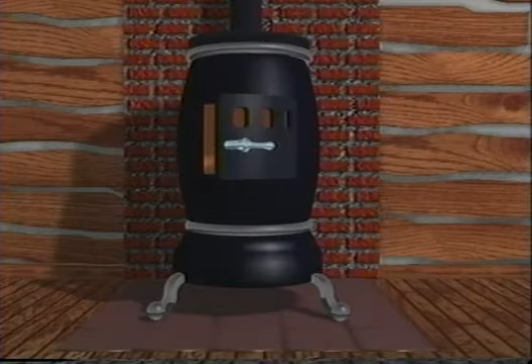Heat from fire warmed mankind long before recorded time. As centuries passed, we learned how to control fire to better warm the spaces in which we live. Ours is an unending search to produce heat safely, economically, and as needed. As technologies evolve to better meet one of mankind's most basic needs, understanding will unlock the doors to a more comfortable future for all of us.

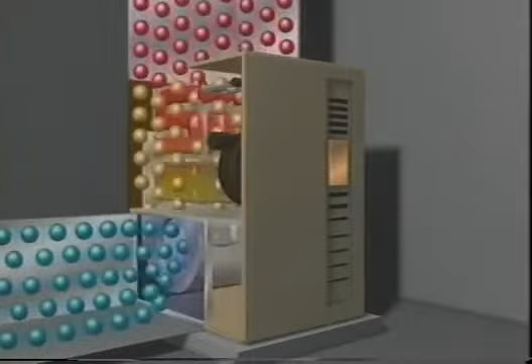Modules 1 and 2 presented an introduction to the basic principles of gas furnaces. Module 3 covered an introduction to gas-fired furnaces, which linked the basic principles to an overview of furnace design, types, applications, and operation. Module 4 discussed the theoretical principles of gas burners, their components, and flame and combustion characteristics.

This module, Gas Controls, focuses on the controlled combustion process. Gas controls, the manual and automatic valves and regulators which control the flow of fuel gas to the orifice and burner, will be explained. The function and operation of various gas controls will be included.

In their broadest sense, gas controls also include the gas ignition systems and some of the safety controls used to regulate combustion in a furnace. Because of the amount of material involved in the full coverage of furnace control systems, the material has been split into 3 modules. Besides the information included in this module, Module 6 covers gas ignition systems, and Module 7 covers furnace safety and operating controls.

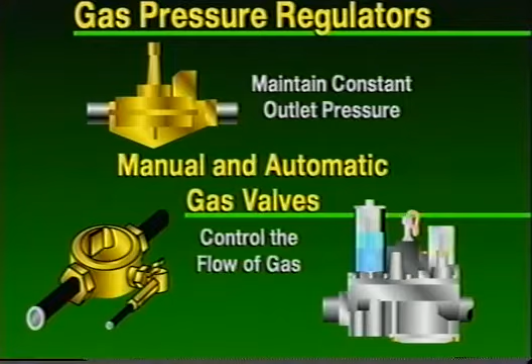It is extremely important to understand the application of a gas control because arbitrarily changing one for another can lead to trouble. Gas controls are carefully selected for a furnace application by the manufacturer for proper function and safety. Therefore, only replacements recommended by the manufacturer should be used.

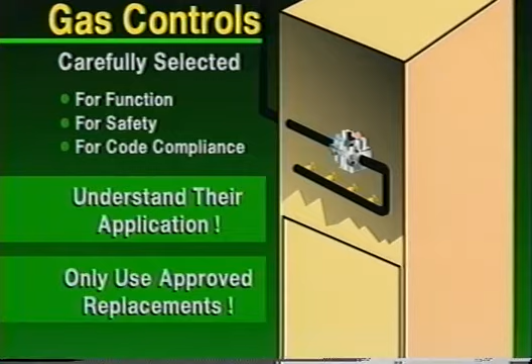Another important consideration is the great variety of control designs available. Gas furnace manufacturers have changed controls from year to year and model to model. Their aim has always been to produce the most reliable and best performing products with the latest technology. Because of the large number of control variations, it's impossible to cover all controls. Therefore, selected examples will be used to explain generic operating principles, adjustment and checkout procedures that apply to most of the gas controls in common use today.

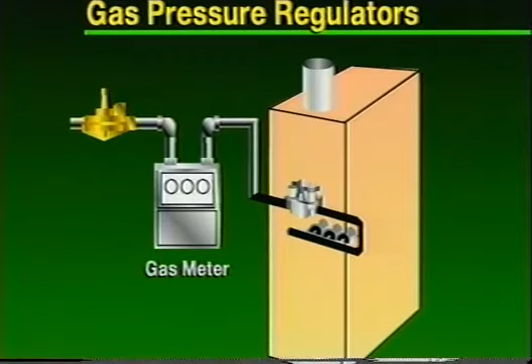The function of gas pressure regulators is to reduce, adjust, and maintain gas pressure downstream regardless of the gas supply pressure upstream. There are 3 pressure regulators used in a typical gas heating system. The first, the service regulator, is used in the gas supply line to regulate pressure to the gas meter and line supplying the furnace. The second, the gas manifold pressure regulator, is located next to or inside the furnace to regulate the gas pressure to the gas valve and manifold. The third is sometimes used to regulate gas pressure to the pilot.

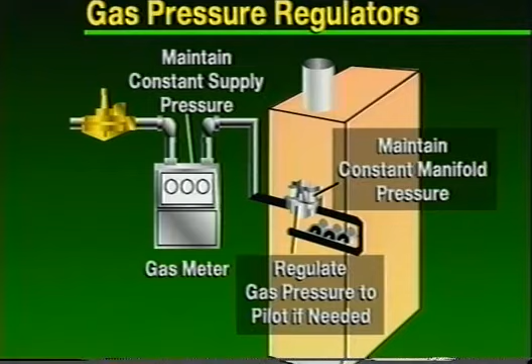Variations in utility supply line pressure are common, and pressures may be too high for direct connection to a gas furnace or other gas appliance. Therefore, a service regulator is required to reduce, adjust, and maintain the pressure being supplied to the appliances in a building. For natural gas,

this regulator is usually provided by the gas utility and installed upstream of the gas meter. It should be adjusted by the utility to supply a pressure of approximately 7 inches of water column at the inlet of the furnace when the furnace is operating. The pressure supplied to the furnace should never exceed the maximum pressure on the furnace rating plate, which is about 13.5 inches water column. Also, the pressure supplied to the furnace should not be less than the minimum of 4.5 inches to assure that the furnace can be fired at rated input.

LP gas service regulators are installed at the gas storage tank by the supplier and set at 11 inches water column. They should only be adjusted by the gas supplier.

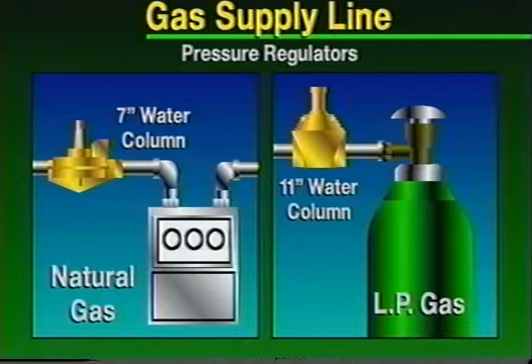Gas furnaces are designed to operate with manifold pressures somewhat lower than the supply pressure. This allows for pressure drop in the gas piping and assures that there will always be adequate pressure to operate the furnace at its rated input.

All natural gas furnace installations have a pressure regulator to control manifold pressure. On most furnaces, the pressure regulator is built into the combination gas valve.

However, you may find some furnaces with a separate gas pressure regulator located on the manifold upstream of the automatic gas valve. On others, it may even be located just outside of the cabinet. Wherever they are located, they all function the same way.

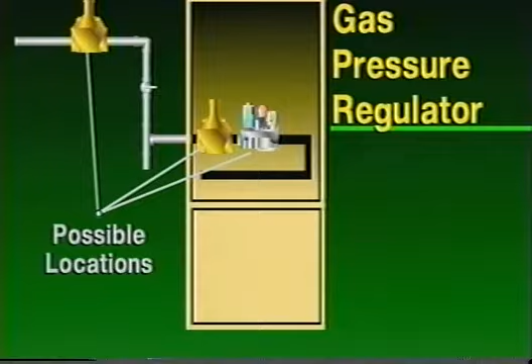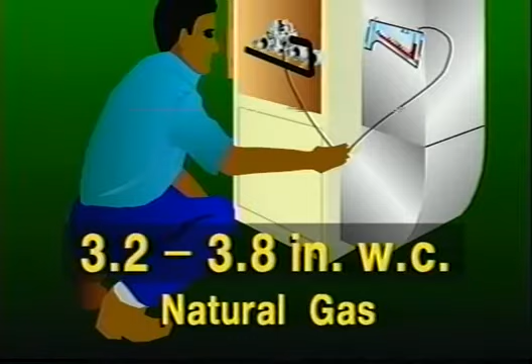Furnace pressure regulators for natural gas should only be adjusted when the furnace is operating. They are usually factory set for a manifold pressure of 3.5 inches water column and may be adjusted on-site within the range of 3.2 to 3.8 inches water column for rated input.

For LP gas, there is no manifold regulator. The service regulator on the tank controls the manifold pressure. If there is a regulator in the gas valve, the manifold pressure should be adjusted between 10.5 and 11 inches water column for rated input.

Manifold pressure can be measured with a water manometer connected at the pressure tap located either on the manifold or on the automatic gas valve.

A typical gas pressure regulator operates the same whether it controls the supply line pressure or manifold pressure. A regulator consists of a flow modulating valve connected to a spring-loaded diaphragm.

The diaphragm senses the difference between the outlet gas pressure below and the atmospheric pressure above. The resulting force on the diaphragm pushes upward against the spring, adjusting the position of the valve to modulate the gas flow.

This is an important concept to understand because it's the outlet gas pressure that is to be held constant with respect to atmospheric pressure.

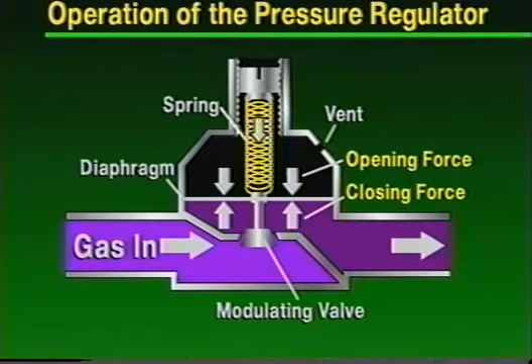The outlet pressure under the diaphragm working against atmospheric pressure and spring force above acts as the closing force on the flow modulating valve.

The spring force can be adjusted by turning a screw. When the downward force of the spring is equal to the upward force of the outlet gas pressure on the diaphragm, the regulator is in equilibrium.

This sets the partially open position of the valve to control the gas flow and hold the outlet gas pressure constant at the desired setting.

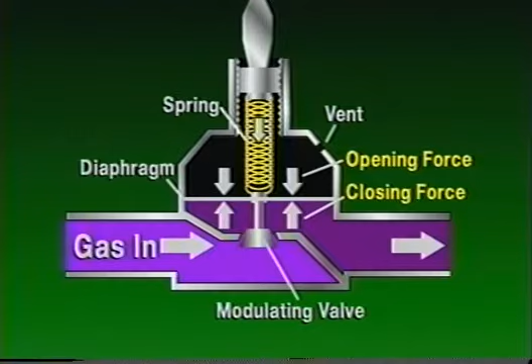The diaphragm and spring remain in equilibrium until there is a change in the inlet or supply pressure or a change in the rate of gas flow through the regulator to the appliances. It's important to understand that the regulator only functions when there is flow through it.

A decrease in the gas supply pressure reduces the outlet pressure under the diaphragm, reducing its upward force against the spring. As the spring becomes the stronger force, it begins to push the valve downward, permitting more gas to flow through the valve.

This increases the outlet pressure back toward its initial setting. The increased pressure under the diaphragm acts against the spring force to close the valve.

These forces come into equilibrium with the valve slightly more open than before the line pressure decreased, but with the outlet pressure held constant. An increase in gas flow through the regulator causes a similar response in the regulator.

If, for instance, a second appliance turns on, the supply regulator must pass more gas but keep the outlet pressure nearly constant. When the second appliance comes on, the regulator outlet pressure starts to drop, reducing the pressure under the diaphragm.

This results in a new equilibrium point with the valve slightly more open and the outlet pressure constant. Note, if the line pressure decreases too much, the regulator may not be able to maintain adequate manifold pressure.

An increase in the gas supply pressure increases the pressure under the diaphragm, pushing it up and closing the regulator valve to reduce the flow. As the outlet pressure is reduced, the spring and diaphragm forces come into equilibrium with the valve slightly more closed than before the line pressure was increased.

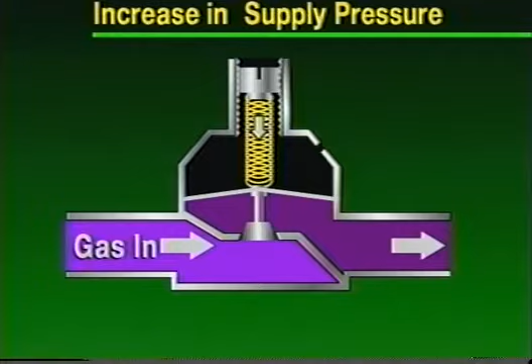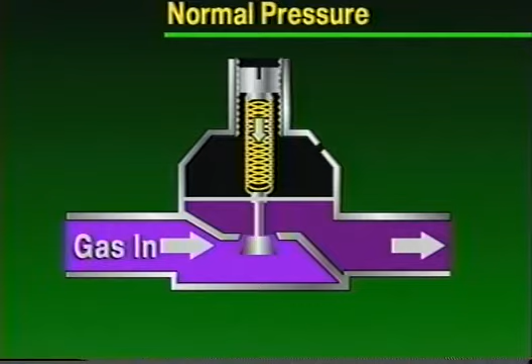A decrease in gas flow through the regulator acts in a similar manner. For instance, if one appliance shuts off, the outlet pressure increases. The increased pressure under the diaphragm tends to close the regulator valve and to reduce the flow and the pressure.

A new equilibrium point will be established with the valve slightly more closed. The outlet pressure remains constant at its original setting.

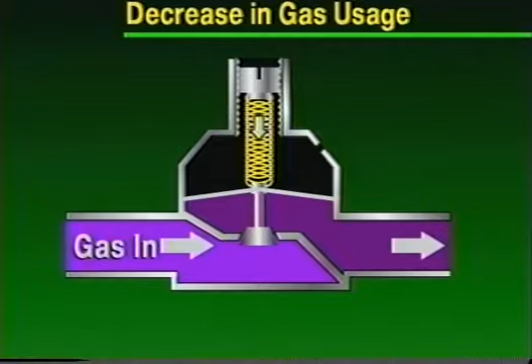A vent opening is needed on a regulator to assure that atmospheric pressure reaches the top of the diaphragm.

For safety reasons, the vent opening must be relatively small to minimize the rate at which gas could escape in case of a diaphragm leak or a ruptured diaphragm. To control the rate of gas escape to a safe level, most regulators have a leak-limiting orifice incorporated in the vent. This orifice is sized to permit the diaphragm to move easily, yet allow only a very small amount of gas to bleed through the opening in case of a leak.

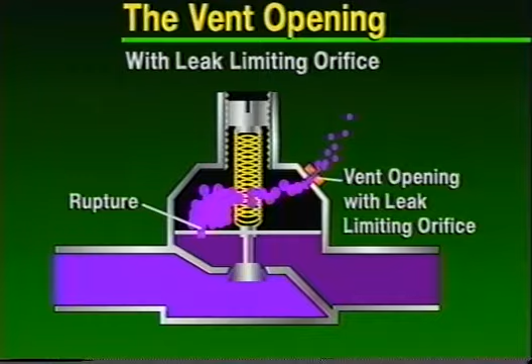Important: the vent opening must be kept open for the regulator to work properly.

If a leak-limiting orifice is not used and the regulator is indoors, a vent line must be installed to carry any escaping gas to the outdoors or into the pilot flame where it can be burned safely. Again, the vent line opening must be kept open for the regulator to work properly.

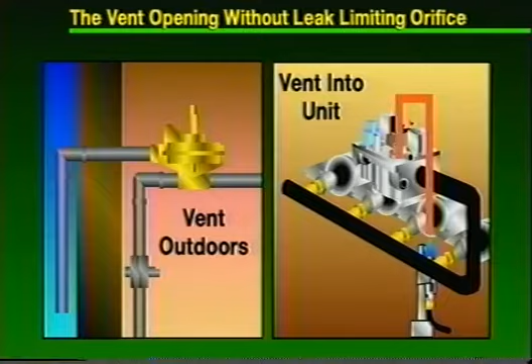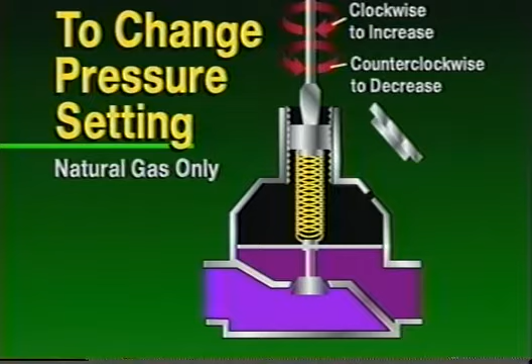To change the pressure setting of a gas pressure regulator, turn its adjustment screw in or out. This varies the spring force exerted on the diaphragm. To increase the pressure setting, turn the adjustment screw clockwise. To decrease the pressure setting, turn it counterclockwise.

Important: gas pressure adjustments can only be made when there is gas flow to the appliance and should never be made without using a manometer or pressure gauge to measure outlet pressure. For pressure regulators controlling manifold pressure in the furnace, pressure taps are provided either on the combination valve or the gas manifold for connecting a manometer or gauge.

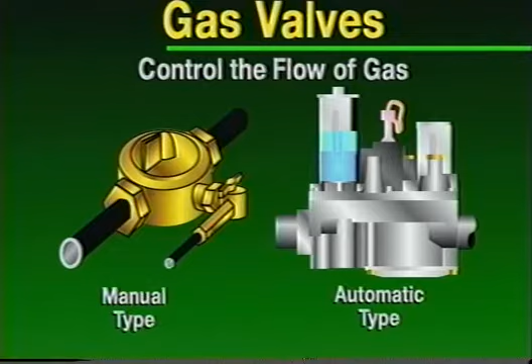Gas valves control the gas supply to any section of the system piping or to an appliance. Gas valves can be either manual or automatic.

All gas supply lines and furnaces must be equipped with manual shutoff valves for service and safety. An accessible manual shutoff valve must be provided by the utility in the gas supply line upstream of the supply gas pressure regulator and meter.

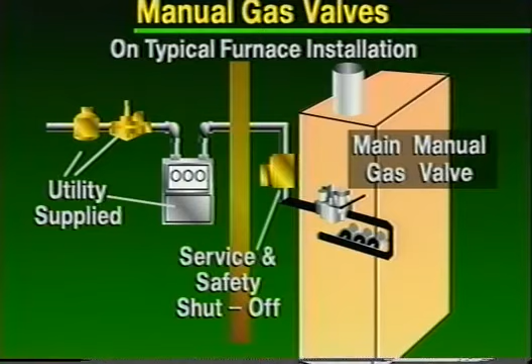Also, it is required that an accessible manual shutoff valve be installed within 6 feet of the furnace for service and safety. A manual main gas shutoff valve is required in the furnace upstream of the regulator and automatic gas valve to shut off the gas supply to the main burners.

Pilots may be provided with a separate shutoff valve. The manual main gas shutoff valve is either built into the automatic combination gas valve or separately installed on the manifold upstream of the gas pressure regulator.

Manual shutoff valves also are used for the pilot gas line. They may be separate or built into the automatic combination gas valve. On non-100% shutoff systems, they connect into the gas line upstream of the manual main shutoff valve so that shutting off the main gas will not shut off gas to the pilot.

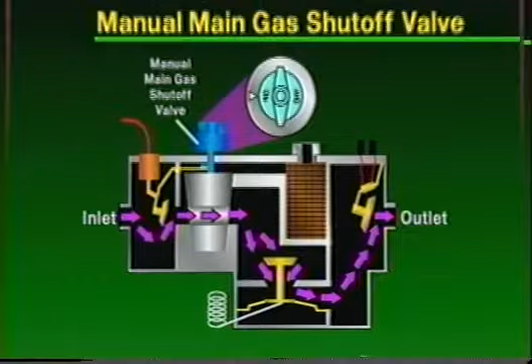All separate manual shutoff valves are of the quarter-turn plug cock type. This type of shutoff is open when the hole in the tapered plug lines up with the piping. The hole is the same diameter as the inside diameter of the connecting piping, so that the gas flow has minimum disturbance and pressure loss as it flows through.

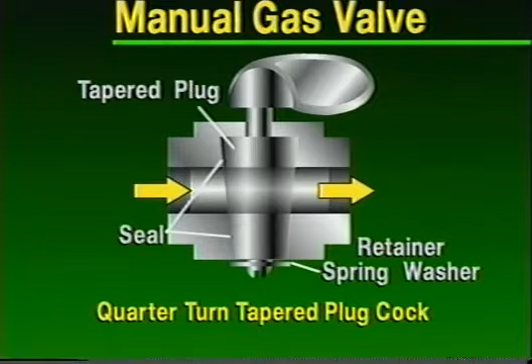Turning the handle or plug 90 degrees closes the shutoff valve completely. From the outside, you can tell that the shutoff valve is open when the handle or wrench lug lines up with the piping or gas flow direction. The shutoff valve is closed when the handle is positioned crosswise to the piping or flow direction.

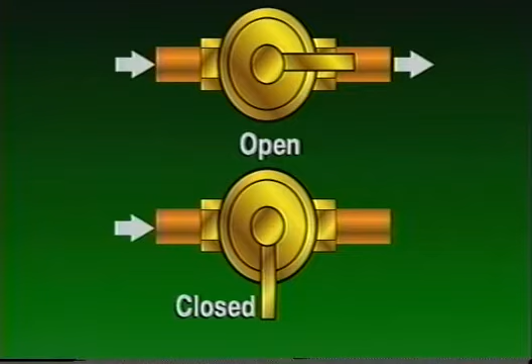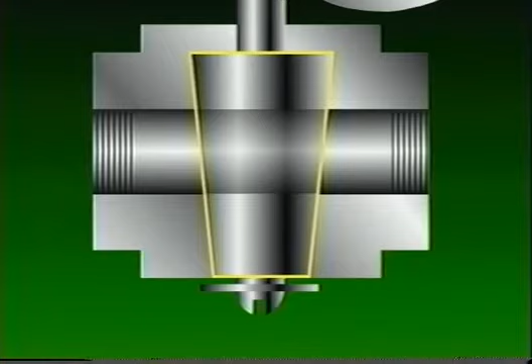This type of shutoff valve does not require any packing or external seals to prevent gas leaks. This is because the tapered plug fits so precisely in the tapered bore of the body that it forms a gas-tight seal. A retaining spring holds the tapered plug tightly against the tapered bore. Usually, a silicone grease is used between the plug and body to ensure the gas seal and to provide lubrication for easier rotation of the plug.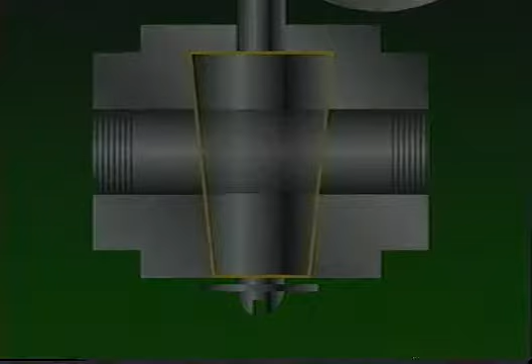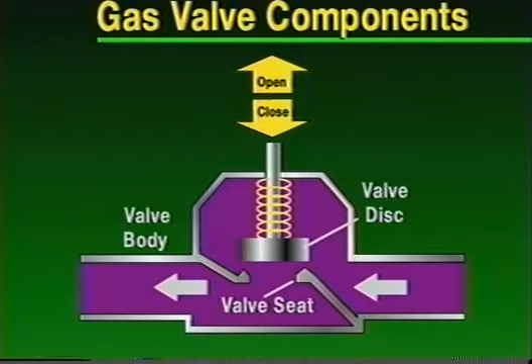An automatic gas valve consists of a valve and an actuator that control the supply of gas to the burners of an appliance during operation. Automatic gas valves usually are of the disc-on-seat type. The main parts are the valve body, valve seat, valve disc, valve stem, return spring, and actuator.

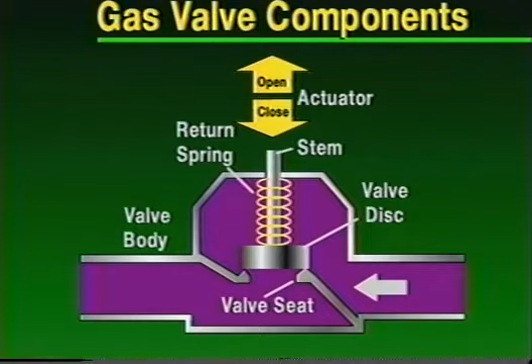The actuator is an electrical device that lifts the valve disc off of the seat when it's energized. Gas flows through the valve when the disc is lifted off of the seat. When the valve closes, gas pressure from the supply line and the return spring holds the disc against the seat, ensuring a good seal. However, to open the valve, the actuator must have enough strength to overcome the force of the gas pressure on the disc as well as the force of the spring.

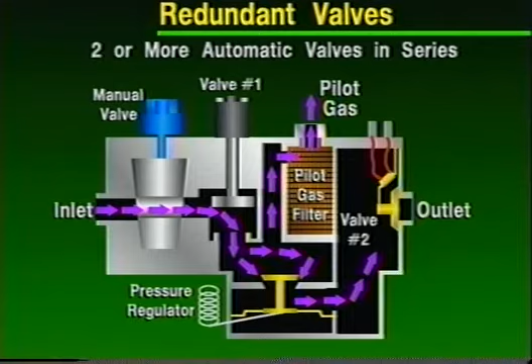Safety codes require that automatic combination gas valves incorporate two or more automatic valve mechanisms in series, along with a pressure regulator and manual valve. These are called redundant valves because both valves would have to fail open for an unsafe condition to occur. However, single-seat type automatic gas valves may be found on older installed furnaces. The operation of redundant gas valves will be discussed in detail later in this module.

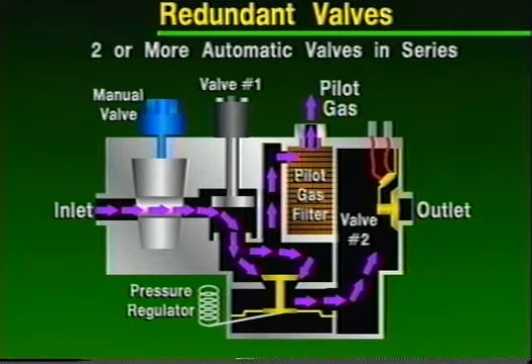In the next section, the basic actuator mechanisms found in automatic valves are covered. All valve mechanisms used in automatic gas valves are classified by the type of actuator used to lift the disc off of the seat. Common gas valve actuator classifications are solenoid, magnetic diaphragm, bimetal diaphragm, bimetallic direct opening, and thermocouple.

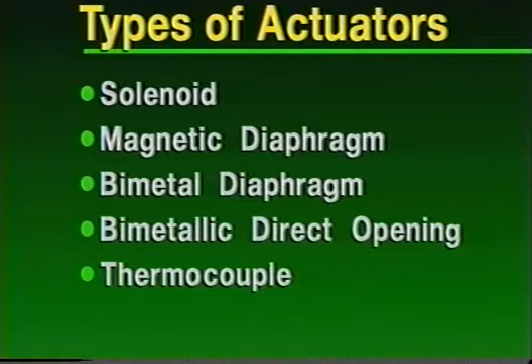The direct-acting solenoid gas valve is normally closed when the solenoid coil is de-energized, meaning the valve closes when power is interrupted. When the coil is energized, the magnetic force generated by the coil attracts the iron armature on the valve stem and lifts the valve off of the seat. The valve stays open as long as the coil is energized.

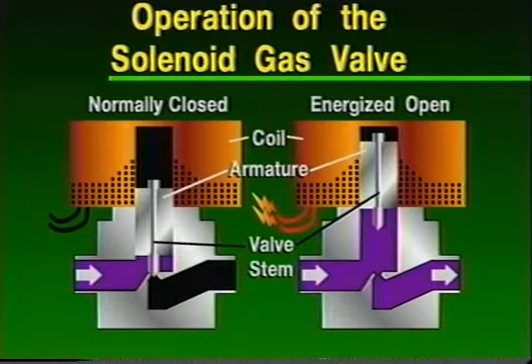Rubber or plastic seats are used to improve sealing and to eliminate closing noise. These are often called soft seat valves. Some valves use a spring above the armature, while others are filled with oil to eliminate the opening noise.

The amount of force needed to overcome the gas pressure and lift the valve off of the seat is proportional to the valve seat area. However, the amount of force needed to hold the valve open is much smaller. This means a large valve needs a large solenoid coil only for opening. The problem is that large solenoid coils draw more power and may need special cooling.

The pick and hold concept provides one solution to large valves. This design has two solenoid coils: the powerful pick coil and the less powerful hold coil are used together to open the valve. Once the valve is open, the pick coil is de-energized and the lower power hold coil remains energized to hold the valve open. How the pick and hold feature may be incorporated into the electrical safety circuit of the furnace will be discussed later.

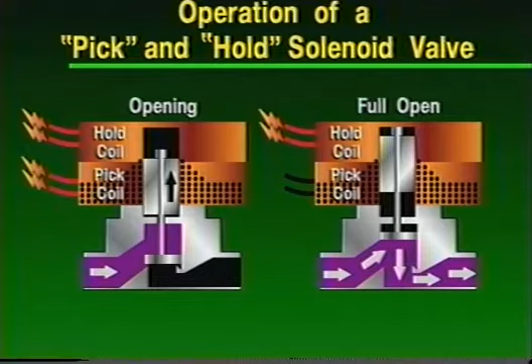The magnetic diaphragm uses a small solenoid valve in combination with a diaphragm valve to get around the seat size limitations of a direct-acting solenoid. The diaphragm utilizes gas pressure as the primary force to open and close the main valve port.

The solenoid operates a relatively small valve in a bleed line to the diaphragm. When the solenoid coil is de-energized, the valve is closed, and the solenoid actuator lever holds the bleed line valve against the bleed port, causing it to close. The bleeder valve is a three-way valve. When the bleed port is closed, the diaphragm pressure equalizer port is open, allowing gas to flow into the chamber above the diaphragm, equalizing the pressure on both sides. This allows the valve disc to drop to the main valve seat and shut off gas flow. The gas pressure above the disc provides the force to hold the valve closed.

To open the valve, the solenoid coil is energized. Its magnetic field pulls the actuator lever against the coil, pushing the bleeder valve down. This action opens the bleed port and closes the pressure equalizer port. The gas above the diaphragm can now escape through the bleeder port, while no new gas can flow in above the diaphragm. Once the gas pressure above the diaphragm bleeds down to atmospheric pressure, the gas pressure under the diaphragm exerts a force to lift the valve disc off of the seat, allowing gas to flow through the valve.

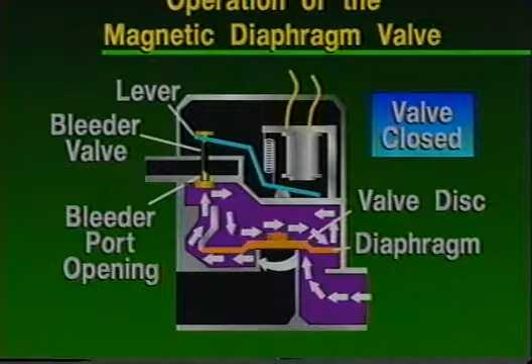The next two types of valves discussed use a bimetal actuator. First, let's look at the basic operating principle of a bimetal. To construct a bimetal, two strips of dissimilar metal are fused together along their entire length. All metals expand when heated and contract when cooled. However, the amount of expansion or contraction is different for each metal for a given temperature change.

When heat is applied to a bimetal strip, one metal expands more than the other. Since the two metal strips are fused together and cannot separate, the bimetal strip warps or bends into an arc because of the greater expansion of one metal. If one end of the bimetal is fastened in place, the other will move back and forth as it's heated and cooled. This movement can be harnessed to operate various devices, such as valves and electrical switches. A bimetal used this way is sometimes called a heat motor.

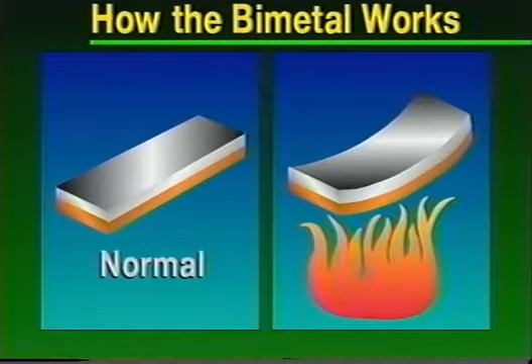The bimetal diaphragm valve is very similar to the magnetic diaphragm valve, except that it uses an electrically heated bimetal to operate the bleed valve instead of a solenoid. The bimetal is heated by a small electric resistance heat element placed on or near it. The heat warps the bimetal, producing a force that opens the bleed valve to allow the gas above the diaphragm to escape. Then, as in the magnetic diaphragm valve, the higher pressure under the diaphragm lifts the valve disc off of the seat, allowing gas to flow through the valve.

When the electric heat element is de-energized, the bimetal cools and straightens to its original shape, closing the bleed valve port and opening the pressure equalizer port. Gas then flows in above the diaphragm, equalizing the pressure and allowing the main valve disc to close. This shuts off the gas flow.

Because it takes time for the bimetal to heat up or cool down enough to operate the valve, a time delay occurs in opening and closing this type of gas valve. This delay is usually about 15 to 20 seconds. Although the delay is not a problem on standing pilot-type furnaces, it is unacceptable for furnaces with direct ignition. These ignition systems need a quick opening and closing valve, such as the pick and hold direct solenoid valve or the magnetic diaphragm valve.

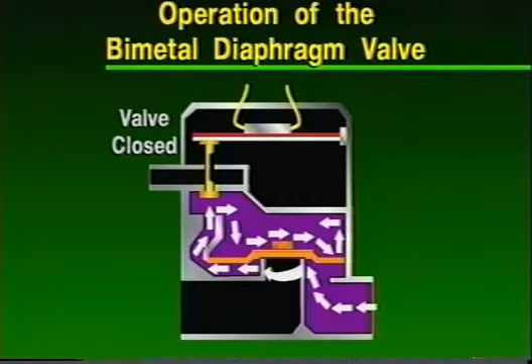Another application of bimetal actuators is in direct-acting bimetal valves. In these types of valves, the warping action of a heated bimetal is used directly to lift the valve disc off of the seat. A small electric resistance heater is used to warp the bimetal and open the valve. As with bimetal diaphragm valves, these valves have delayed opening and closing due to the time necessary to heat up and cool down the bimetal. This makes them unsuitable as main gas valves for direct ignition. As with the direct-acting solenoid, these valves are limited by the relatively small force generated by the bimetal. Consequently, they are better suited to smaller valve applications.

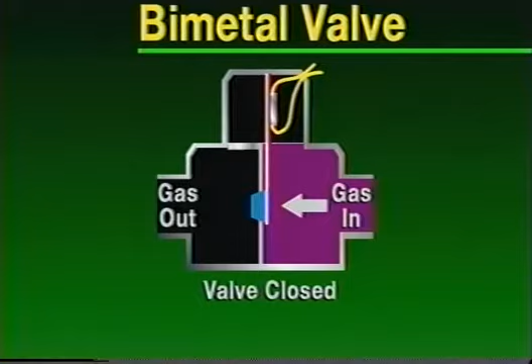A thermomagnet, much like a solenoid coil, is often used with thermocouple safety pilots to operate the safety valve in 100% shut-off automatic valves. The thermocouple, heated by the pilot flame, generates a small electric current, which is sufficient to energize the thermomagnet holding coil. The magnetic force of the thermomagnet coil is too small to pull the safety valve disc open directly, but it does have enough force to hold the valve open once it has been opened manually. For this reason, the safety valve must be manually opened and held open during the time it takes to light the pilot and heat the thermocouple enough to generate the current that holds the valve open.

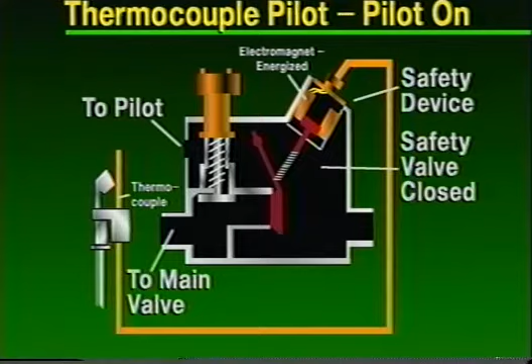If or when the pilot goes out, the thermocouple cools and its current drops to a point where the coil magnetic force is too weak to hold the safety valve open, and it drops closed, shutting off gas flow to the burners and pilot. The furnace remains off until the pilot is manually reignited.

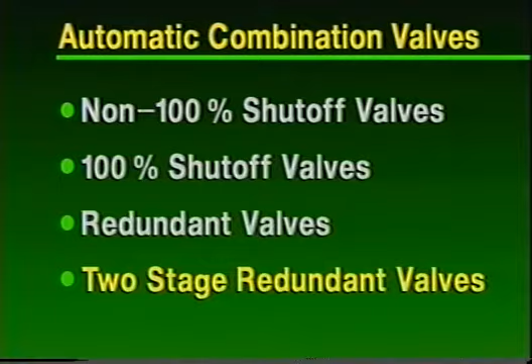Combination gas controls provide all of the gas control functions in a single compact device. The design of combination valves varies considerably between manufacturers, but the basic functions provided always include manual main and pilot gas shutoff, pressure regulation, pilot gas adjustment, and automatic main gas shutoff. Also provided are taps for gas supply and manifold pressure measurement, and fittings for connecting the pilot gas tube. Combination gas control designs also vary depending on the type of gas or ignition system being used. Besides the basic functions above, they also may include non-100% and 100% shutoff, redundant automatic main valves, and multi-stage valves. These combination gas controls are sometimes also referred to as automatic combination valves.

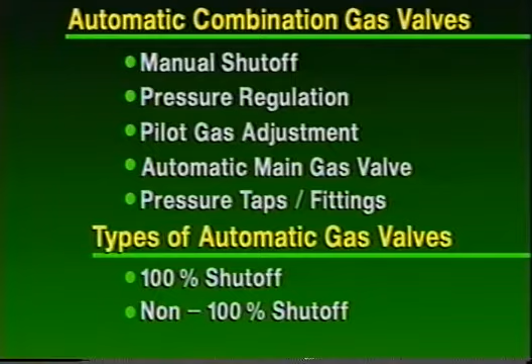The non-100% shutoff function means that the safety control shuts off only the gas flow to the main burners in case of a pilot outage. Gas will continue to flow to the pilot whether it's lit or not.

Non-100% gas valves were used for many years on natural gas furnaces installed both indoors and outdoors. However, for improved safety, all furnaces produced after November 1989 are required to have 100% shutoff.

Let's look at one of the simpler types of combination gas controls with the non-100% shutoff function. You would find this type of gas valve installed in natural gas furnaces with standing pilots manufactured before 1989.

This combination control has a manual gas valve with a knob, a pressure regulator, and a heat motor or bimetal actuated main gas valve. When the knob on the valve is turned to pilot, gas flows through a groove in the manual valve and then through the pilot filter chamber and the pilot tubing to the gas pilot, where it can be lit manually or automatically.

All pilots are equipped with a safety device that prevents the main gas valve from being energized and opening automatically until the pilot is lit. The pilot's safety device also closes the main gas valve if the pilot goes out. The pilot's safety device will be covered in more detail in Module 6, Gas Ignition Systems.

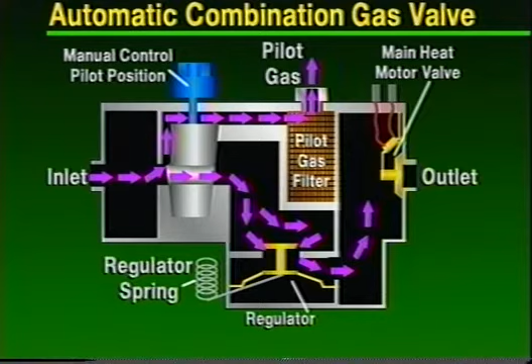Although natural gas is lighter than air and normally disperses, there are safety concerns about gas collecting in the combustion chamber when the pilot is out. Important: before attempting to relight the pilot, always turn off the pilot gas at the valve knob and wait at least 5 minutes for the gas to clear out.

The 100% shutoff function means that all of the gas to both the pilot and the main burners is automatically shut off if the pilot goes out. This arrangement utilizes two valves in series: the safety gas valve, which shuts off all gas flow to the burners and to the pilot in case the pilot goes out, and the main gas valve, which controls the normal on-off operation of the main burners.

Use of the 100% shutoff function has been a long-standing safety requirement for LP gas furnaces installed indoors. It prevents the heavy LP gas from collecting in dangerous quantities in the combustion chamber or around the furnace in case the pilot goes out. 100% shutoff has been a requirement for all furnaces since 1989.

In addition to the manual gas valve, the pressure regulator and the main gas valve, the 100% shutoff combination control has an internal 100% safety shutoff valve upstream of the manual gas valve and the pilot connection.

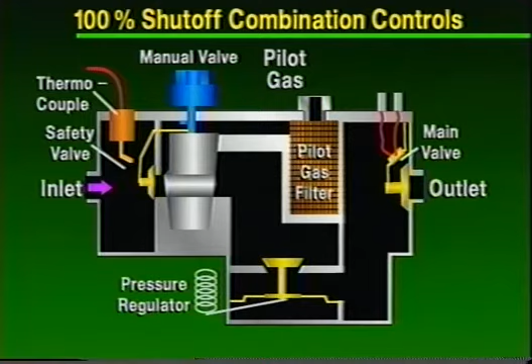This valve is manually opened during the lighting process and is held open by a thermomagnet or holding solenoid energized by the lit pilot. If the pilot goes out, the safety shutoff valve will drop closed, stopping the gas flow to both the pilot and to the main gas burners. This is what is meant by 100% shutoff.

The following steps are used when lighting a pilot with a furnace equipped with a 100% shutoff type valve. The first two steps are very important for your safety.

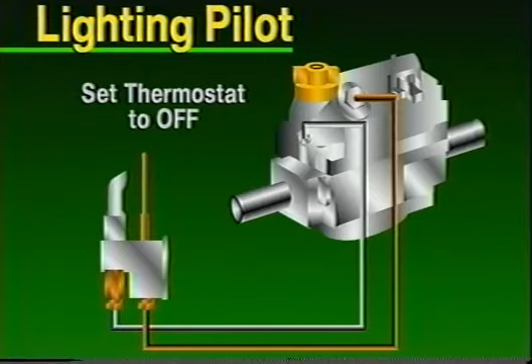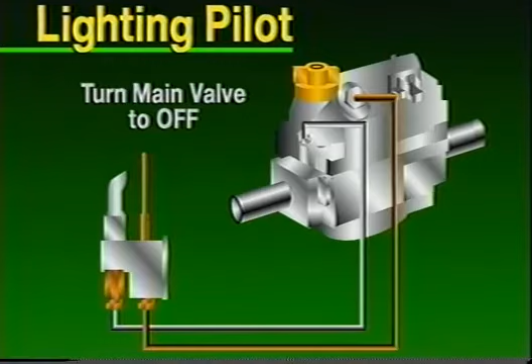1. To be sure that the main gas valve stays closed when lighting the pilot, always turn the thermostat to off or set it low. 2. To be sure that there is no gas in the combustion chamber, turn the main manual valve knob to off and wait 5 minutes. 3. Turn the main manual shutoff knob to the pilot position and depress it to open the safety shutoff valve.

100% shutoff valves require that the internal safety shutoff valve be manually opened in order for gas to flow to the pilot. Note that on some types of valves there may be a separate button which must be depressed instead of the shutoff knob. In either case, this allows gas to flow to the pilot.

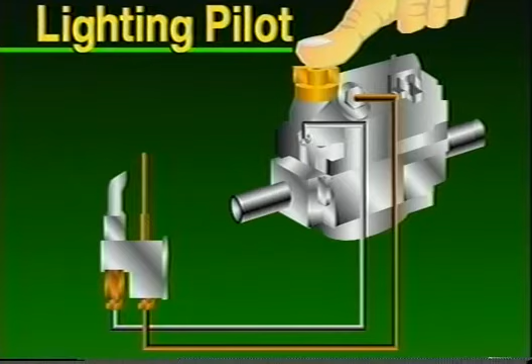4. Light the pilot manually. 5. Continue to hold the knob or button down for about 45 seconds until the pilot safety switch or thermocouple is hot enough to hold the valve open.

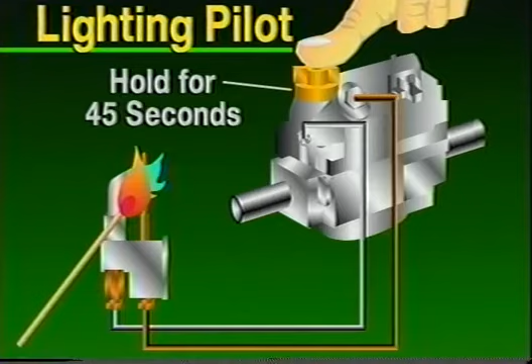To continue the lighting steps: 6. Release the button or the knob and check to see that the pilot stays lit. If it goes out, you will have to start over and wait longer.

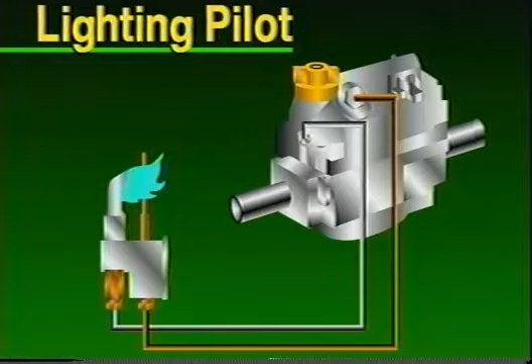7. Turn the main manual valve knob to the on position once the pilot is lit and the safety circuit completed, or the thermomagnet energized. 8. The pilot gas continues to flow. The gas can flow to the main burners whenever the downstream automatic valve is energized electrically.

If the pilot flame goes out and the thermocouple or pilot safety switch cools, the safety shutoff valve closes, shutting off all gas flow. The gas valve cannot open again until the pilot is relit.

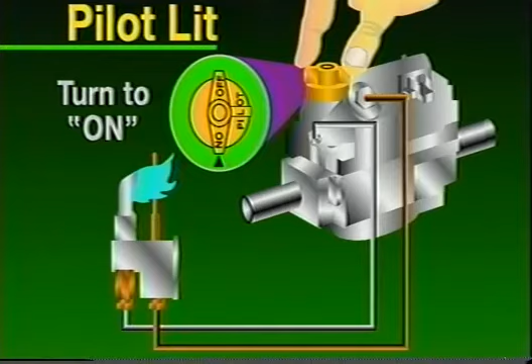Safety codes require that all furnaces produced after 1989 have 100% shutoff valves. The 100% shutoff valve with thermocouple pilot discussed earlier meets this requirement, but it requires manual relighting of the pilot and will not work with automatic reignition systems.

The redundant valve has been designed to provide 100% shutoff with automatic reignition pilot or direct burner ignition systems. Redundant means 2 fully automatic valves in series.

Let's look at a redundant automatic combination gas valve installed with a reignition pilot system. In this design, a solenoid-operated redundant gas valve is located downstream of the manual gas valve and in series with the main gas valve. When the redundant valve is open, gas can flow to the pilot and the main gas valve. A similar redundant automatic combination gas valve is available for use with hot surface type direct burner ignition systems.

The valve has the pilot connection blocked. When there is a demand for heat, the pilot igniter and the redundant gas valve solenoid are energized. The redundant valve opens, allowing gas to flow through the pilot filter and tubing to the pilot.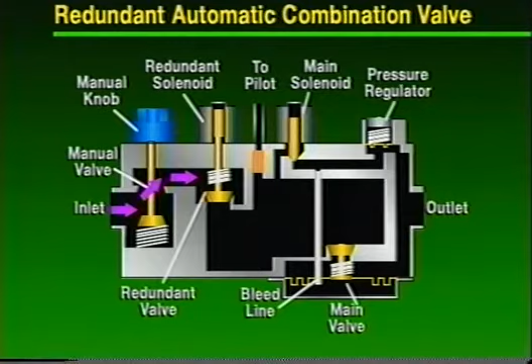The redundant valve solenoid may contain 2 separate coils, the pick and hold coils. Together, the pick and hold coils have enough strength to lift the redundant gas valve disc off of its seat. When there is a demand for heat, both coils are energized to open the valve.

After the pilot heats up, the pilot's safety device de-energizes the pick coil. The hold coil remains energized to keep the redundant valve open.

The pick and hold coils are designed with a safety feature so that if there is a momentary electrical or gas failure, or a short thermostat cycle, or any other malfunction that puts the pilot out, the hold coil will be de-energized, shutting off the gas to the pilot. The redundant valve cannot reopen when electricity is restored because the hold coil cannot open the valve by itself.

The pick coil and pilot igniter cannot be energized until the pilot has cooled down, and the pilot safety device recycles the system through the pilot reignition sequence.

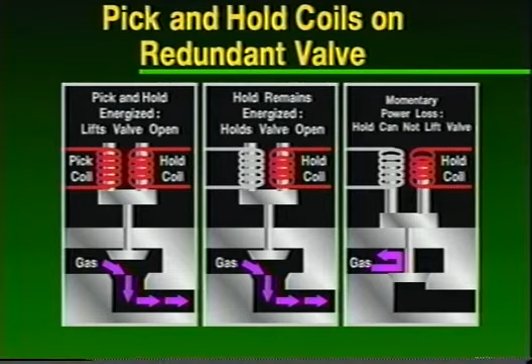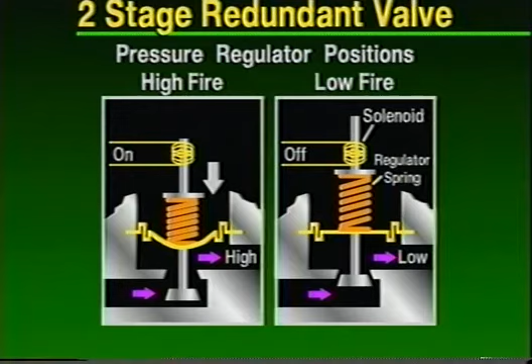Two-stage redundant combination gas valves provide two different firing rates in furnaces for improved comfort and economy. The high fire stage provides full rated input and enables the furnace to properly heat the home on the coldest days. But on moderate temperature days, which occur more often, the furnace operates in the low fire stage to minimize on-off cycling and provide more continuous warm air flow for better comfort. The low fire stage fires at about 70% of the high stage input.

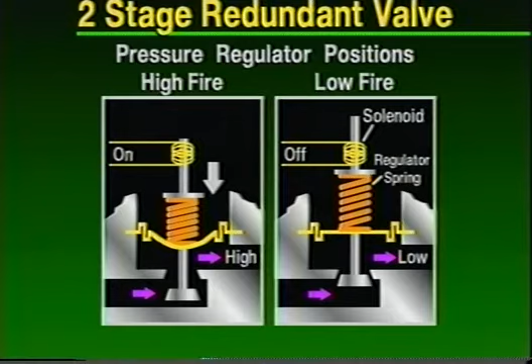The basic operation of the two-stage redundant combination gas valve is the same as the single-stage combination valve described previously. The main difference is in the construction and operation of the gas pressure regulator. A third solenoid sets the pressure regulator spring to the high fire position, about 3.5 inches water column, producing full-rated gas input. When the solenoid is off, the regulator spring returns to the low fire setting, about 1.7 inches water column, producing 70% of rated input. The pressure regulator has two independent adjusting screws for setting the high fire and low fire manifold pressures.

Now let's look at some basic gas valve troubleshooting procedures. We'll start with a simple control system. The principles of this system also apply to more complex systems.

In checking a simple automatic gas valve with a standing pilot, first be sure that the proper voltage is applied to the furnace and that the pilot is lit. Then set the thermostat up to demand heat and observe the burners for ignition, or listen for the gas to flow from the manifold. If either is observed, the valve opened. If not, you must check the valve.

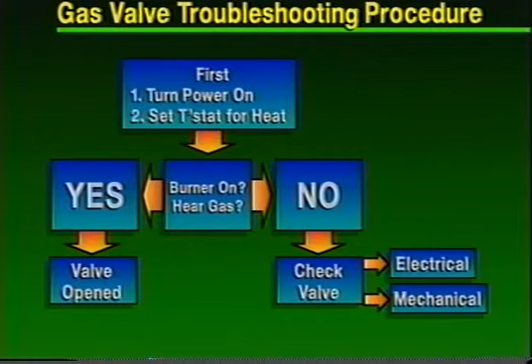To check the valve, first verify that there are 24 volts across its terminals. If voltage is present, the problem is probably in the valve itself. If there is no voltage present, the valve will not operate; there must be a problem elsewhere in the electrical circuit. For instance, either the thermostat, high temperature limit switch, or the pilot safety switch could be open. You can check the voltage across their terminals to find the open circuit.

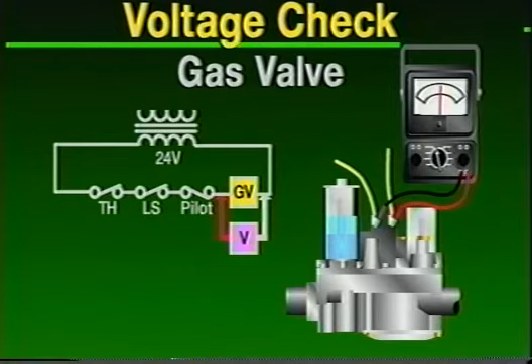Important: never short across valve terminals with a wrench or screwdriver to check for voltage. This type of abuse can burn out the coils in the valve, the thermostat anticipator, or the transformer.

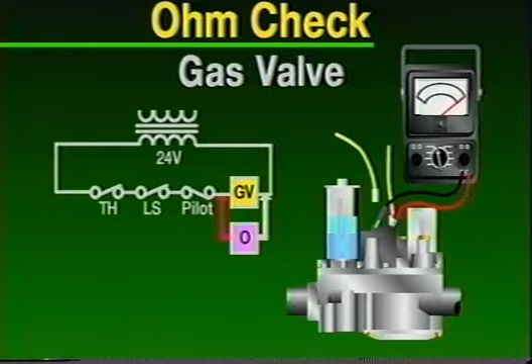To check the valve, turn off the electricity to the furnace and remove one electrical lead from a valve terminal. Then connect an ohm meter across the terminals of the valve. If a readable resistance is obtained, the valve is probably okay electrically, but could be at fault mechanically. If an infinite resistance is read, the coil circuit is open, indicating a broken wire or burned out coil. If a zero resistance is read, the circuit is shorted. In either case, the valve must be replaced.

To check for mechanical failure, such as a sticking valve, cycle the valve on and off and observe the burner operation. If the burners stay on after the valve is turned off, then it's stuck open. Often it closes if tapped lightly; however, this just confirms that it was stuck and is not a cure. The only solution is to replace a valve that has stuck, since it will probably stick again. This is a serious problem, since stuck gas valves can cause damage to the unit or the building.

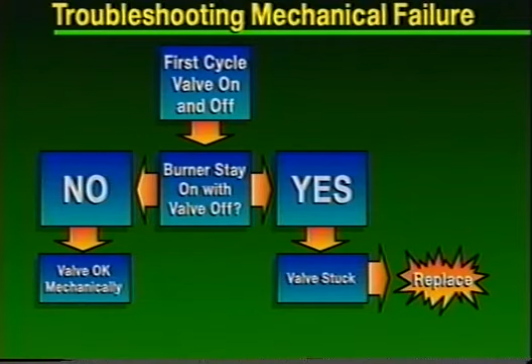Any mechanical failure or electrical failure is grounds for replacement, since valves should never be repaired in the field. Caution: some valves with bimetal actuators take time to open and close. Be sure you give them enough time to operate before condemning them for failure to open or close.

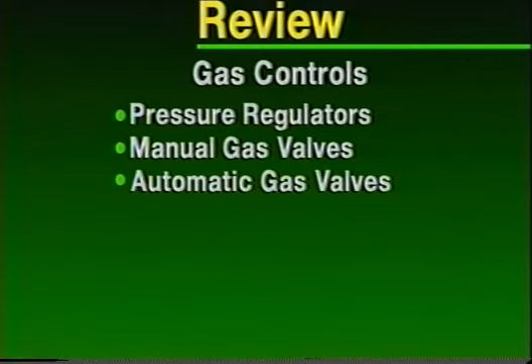In this module, gas controls have been explained and discussed. A description of the operating principles of gas pressure regulators, manual gas valves, and various automatic gas valves and their actuators was included. The configuration and operation of several common types of automatic combination gas valves were also covered. The gas controls described in this module regulate and control the flow of gas from the supply to the orifice.

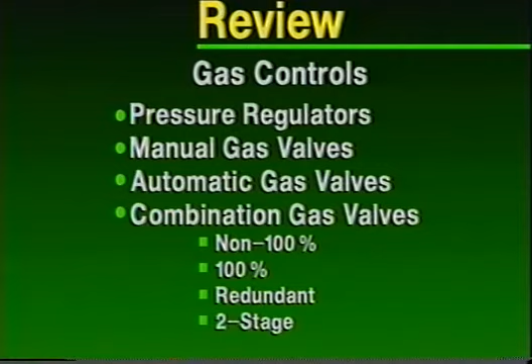In the broadest sense, gas controls also include ignition systems and safety and operating controls. These will be covered in the next two modules. Bear in mind as you review these modules that the gas controls, ignition systems, and safety and operating controls all must work together for proper furnace operation. In Module 6, Gas Ignition Systems, the function and operation of various types of ignition systems are included. The types of ignition systems discussed are standing pilots, reignition pilots, and direct ignition.